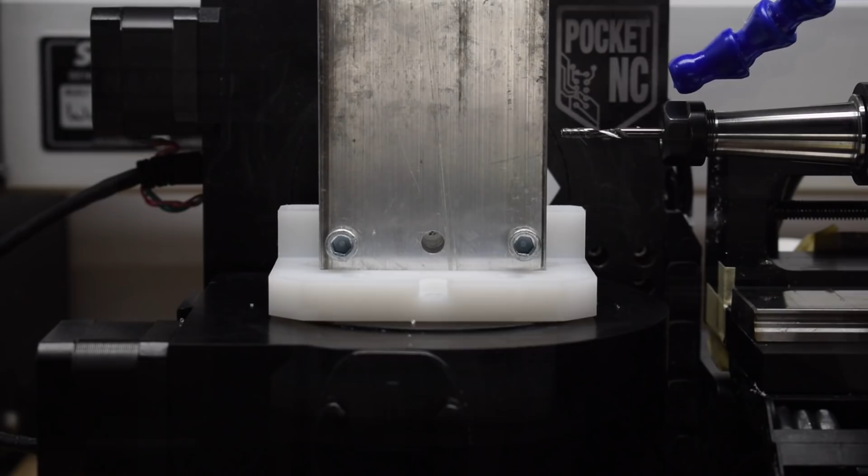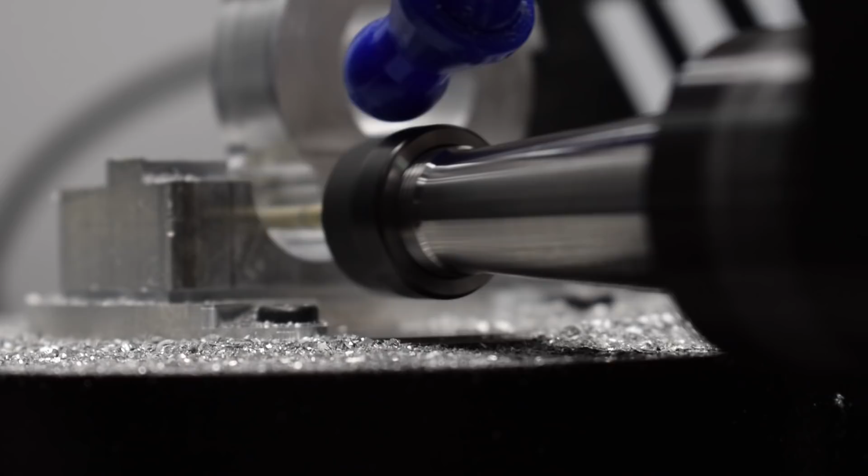In my previous video I made an Eddie Kramer style stock fixture for Pavel the PocketNC, and it totally doesn't work. Aside from the limited rigidity, as some of you pointed out, because of the material margin required to use it, I would immediately exceed Pavel's y-axis travel limit if I tried to use it. A quick visual inspection would have told me that, but I neglected to do that, so I'm back at square one. What I need is an even lower profile way to get bar stock on Pavel.

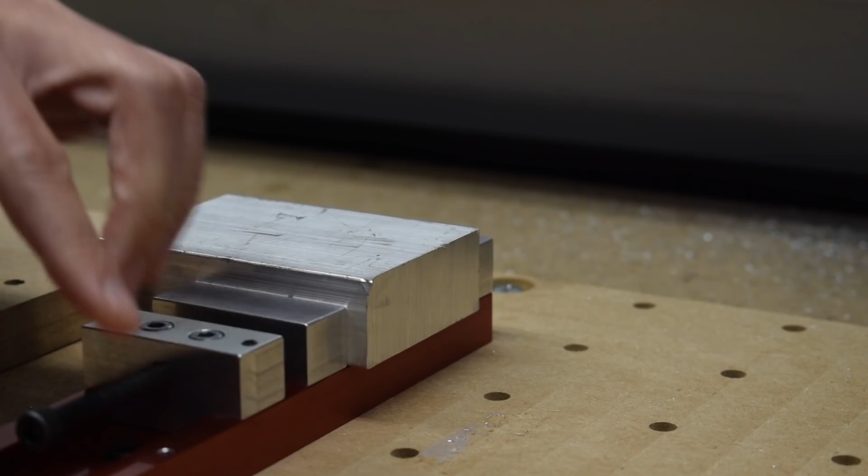Going through the B-table and using the ER40 collet is theoretically possible, and I've done something like that, as has Johnny Q90, but with a piece of stock this wide, I'm worried I won't have enough holding torque on that interface. So I need a fixture plate that holds my stock at points as widely spaced as possible. Here's what I came up with: an adapter that bolts to the B-table that the stock itself also bolts to.

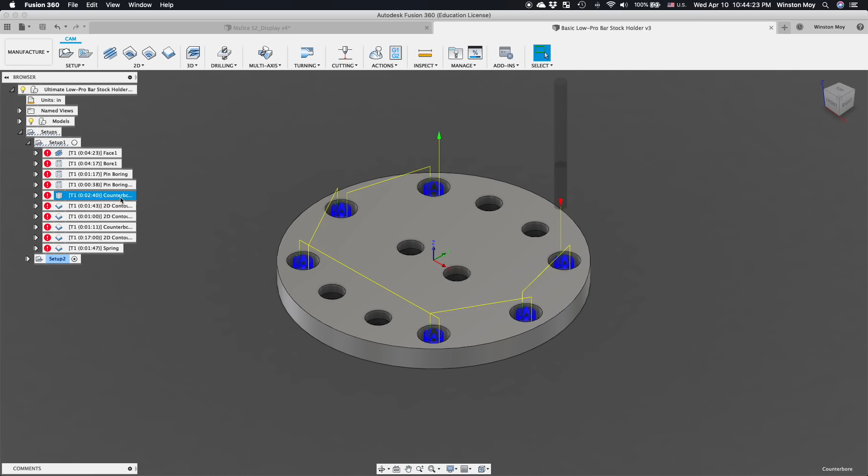Super simple, lower profile than just about anything short of a dovetail work holding solution, which doesn't exist for the PocketNC anyways. I drew up this idea in Fusion and made some toolpaths for it, face, bore holes, profile, really easy using my usual Nomad recipes.

If you don't know what they are, I'll link to a video on the Carbide 3D channel where I have them laid out. One small complication was that my holes for mounting my stock needed to be counterbored from the other side, so I had to flip my adapter over and re-index it. To do that, I machined some locating features to align my adapter.

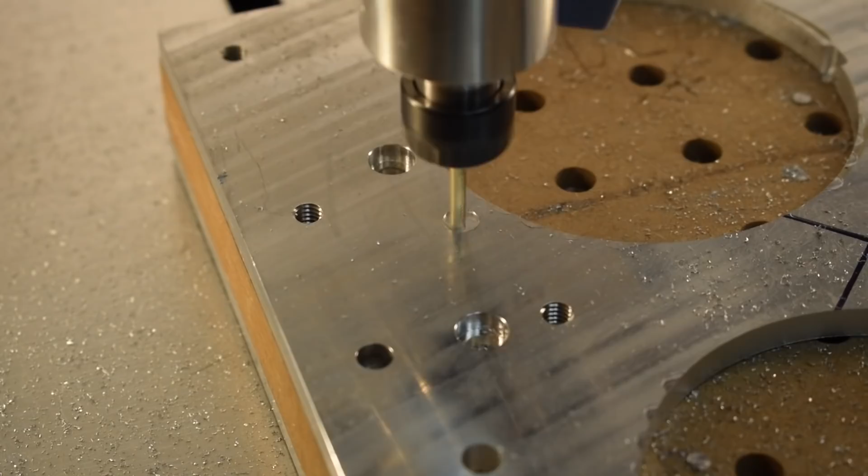Double-sided tape was used to hold down my workpiece since this counterbore would be a relatively gentle operation.

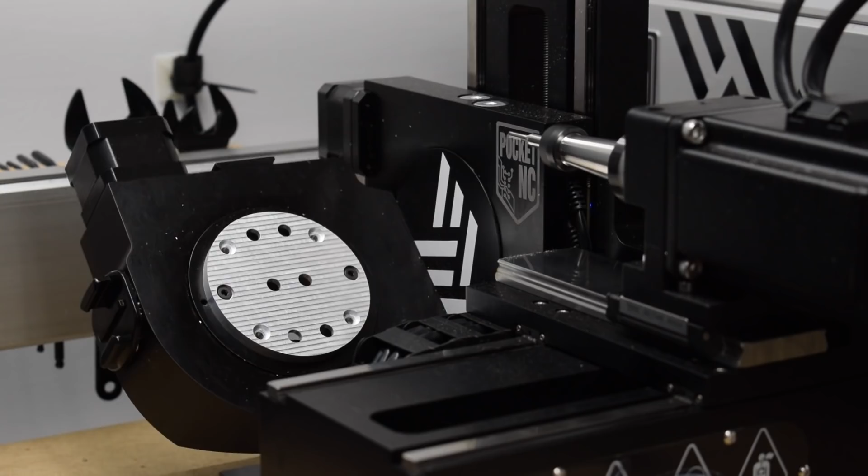Then I got home and did a test fit on Pavel. Things were looking really good, but before I could load anything onto that fixture plate, I needed to prepare my stock. This fixture requires material that's flat on one side and has tapped holes drilled in a rectangular pattern.

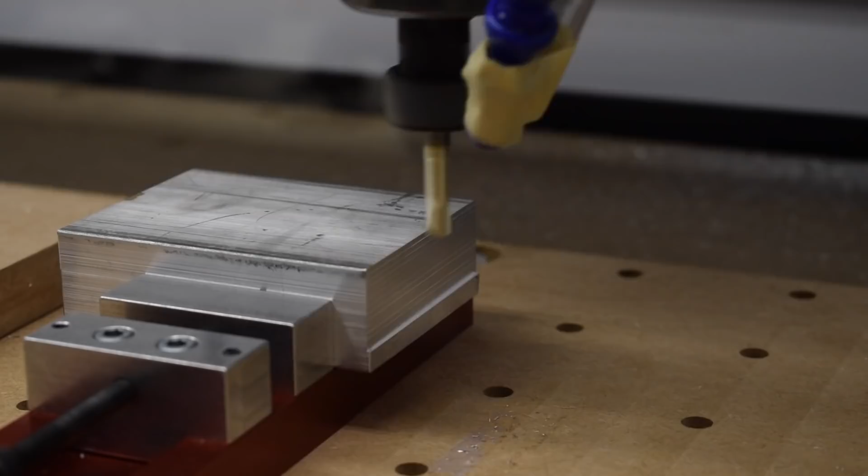Doing that by hand without a drill press was dicey at best, so I knew I'd have to call upon my Shapeoko for this bit of stock prep. First, I flattened the ends of my stock using a 1/4-inch cutter.

Next, I had to figure out how to drill the holes. The Shapeoko doesn't have enough clearance to do this in a straightforward way, so I had to get creative. Even though you can only fit 3 inches and change under the Shapeoko's gantry, you can get away with a much taller piece of stock if the gantry never has to move over it.

In that case, you only need to clear the router, and if you move the router up, you can get a much more respectable 4 or 5 inches to work with. I'm using a boring operation with a shallow pitch in the hopes that smaller chips will be easier to clear, and an 1/8-inch single flute end mill to minimize the chances of chips clogging the flutes.

Total depth of cut is 1/2 inch, which brings the collet down a little too close for air blast to be effective. Later I would realize I really only needed about 3/8 of an inch of hole here, but without that knowledge I ended up stalling the spindle once.

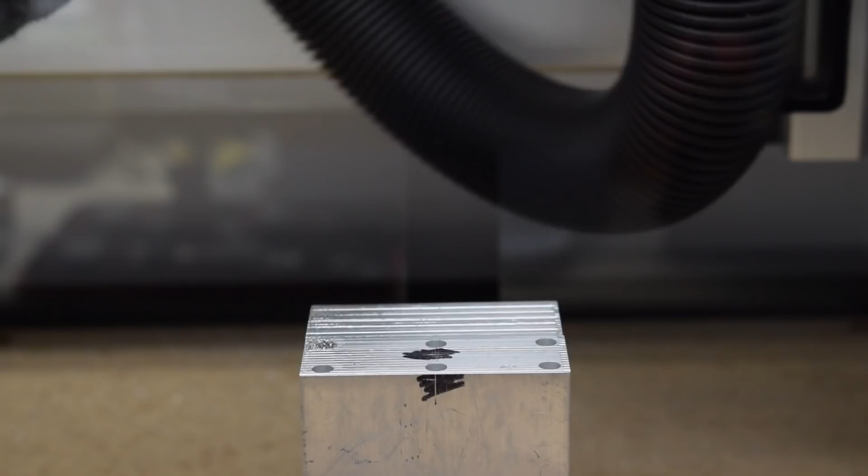Once I had these holes machined, I tapped them using a bottoming tap set for maximum threads in a blind hole. My stock fit on the adapter with some 1/4-20 cap screws, and the adapter fit on the machine.

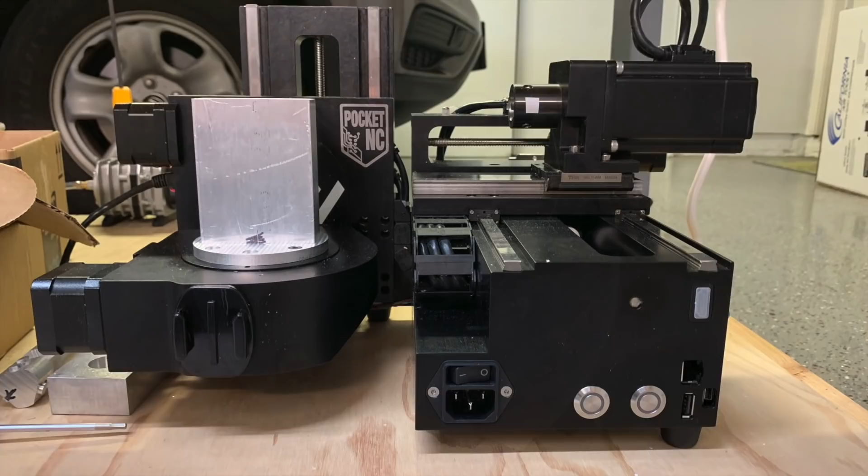Things were looking good, but then I realized I was still cutting things uncomfortably close from a clearance perspective. Let me sketch out some construction planes for you. These represent my y-axis bounds. On the y-axis, you can't exceed 2.55 inches above the center of rotation.

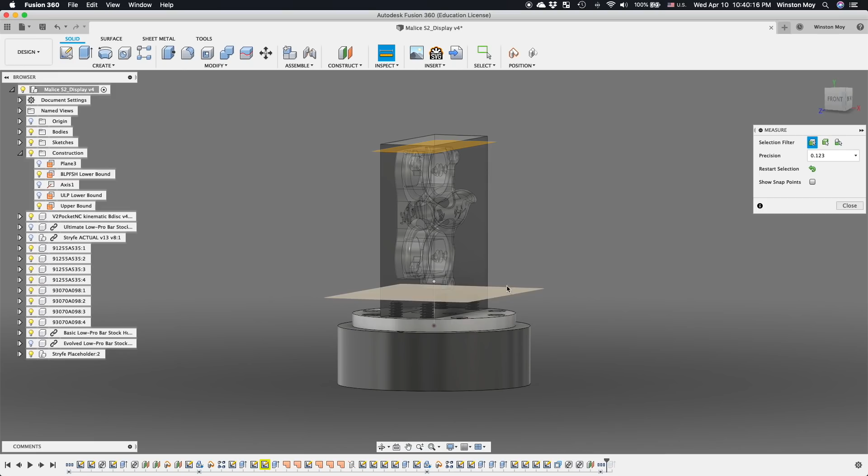That is a soft limit that cannot be overridden. On the bottom, the spindle is limited by the ER11 collet nut, which is a few thou under 3/4 of an inch in diameter, so 3/8 of an inch above the top face of my fixture plate is as low as I can cut. The space between these two planes is not only where my part has to fit, but also my toolpaths. So my part has to fit between these planes with at least 1 cutter radius of margin all around. Machining my part would be impossible within these constraints.

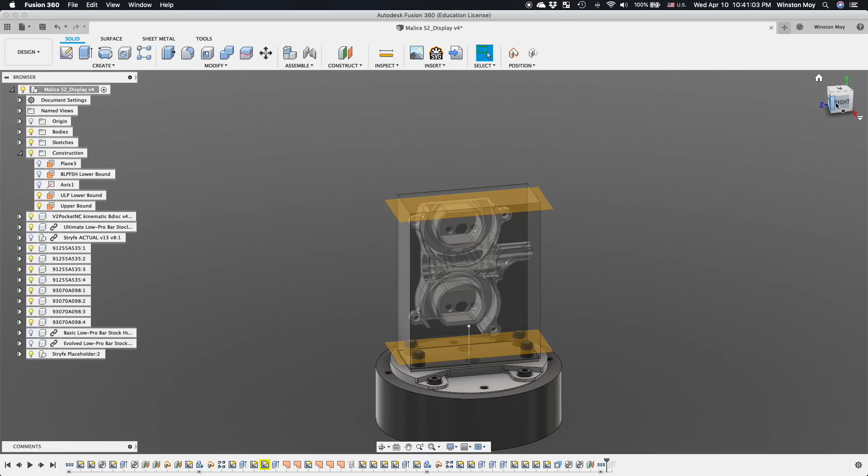I needed more clearance. Reducing the thickness of the fixture plate was the only way to do this. Had I been at the Carbide 3D shop where I currently keep my Nomad, I would have modified my fixture plate there, but the day I realized my screw-up was on a Friday and I really wanted to start the 5-axis part of my project over the weekend.

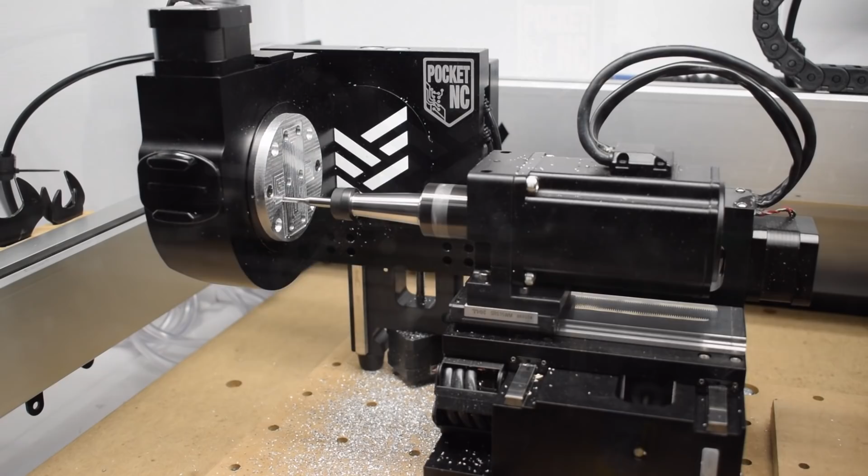I'd have to do all my rework on the PocketNC. I made some modifications to the model and split up my machining into 2 parts. I would be having to machine down almost every part of my fixture, including where the bolts sat, but I also needed at least 2 bolts in place at any given time to keep the piece from flying off the PocketNC, so that would require playing musical chairs with my bolts.

The nose to table of the PocketNC is actually quite large. It's extremely difficult to machine down to the surface of the B-table from a perpendicular orientation, even with an extended length tool holder. I used a Datron 3mm single flute because of its 6mm shank. That would give me maximum rigidity at the insane reach needed to modify the fixture plate.

However, because of the ridiculous looking tool setup and the rigidity of my rotary axes on the Gen 1 V2, I really couldn't push my feeds and speeds any faster than I could on the Nomad. Pavel might have more power, but he can't put it down. Newer revisions of the V2 machine should fare better.

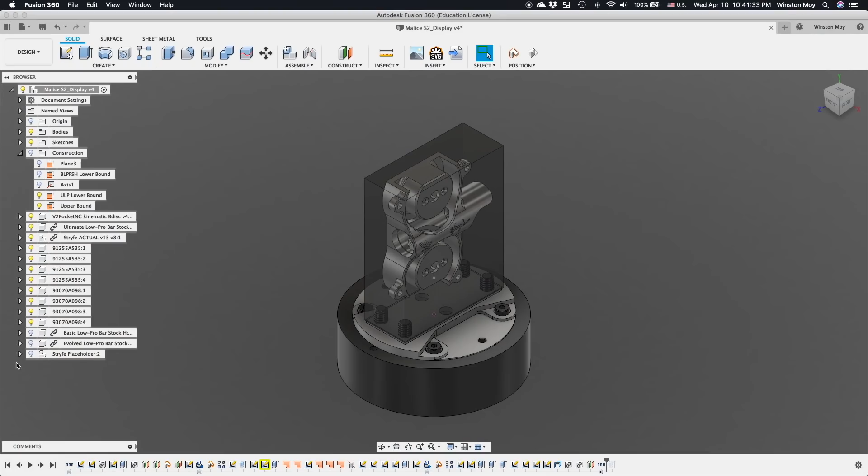Milling away the material between my primary hold-down bolts took a fair amount of time. If I could do it all again, given what I know now, I would actually have modeled this fixture plate without any material there at all. Then I could just cut it away with a contour op and save a lot of time.

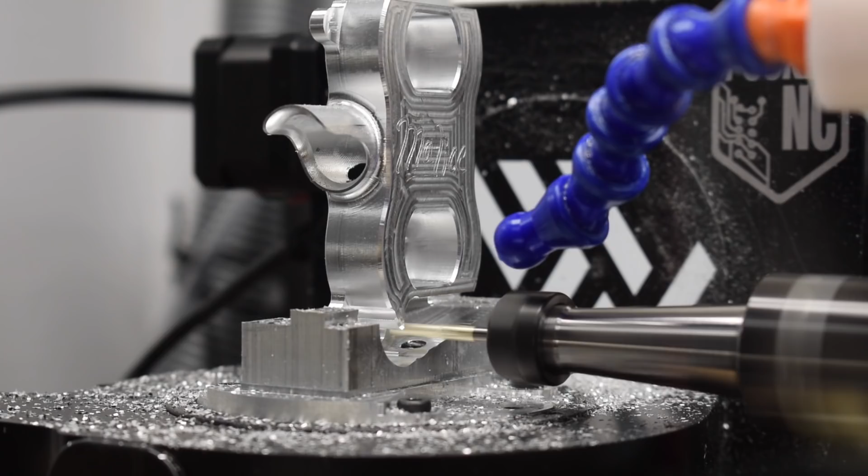Inefficiencies aside, what I ended up with is what I believe to be the lowest profile fixturing solution practically possible for large stock on the PocketNC. This fixture was the key breakthrough I needed in order to proceed with Project Malice, a collaboration I'm doing with another maker in Canada. But that's a project for another video.